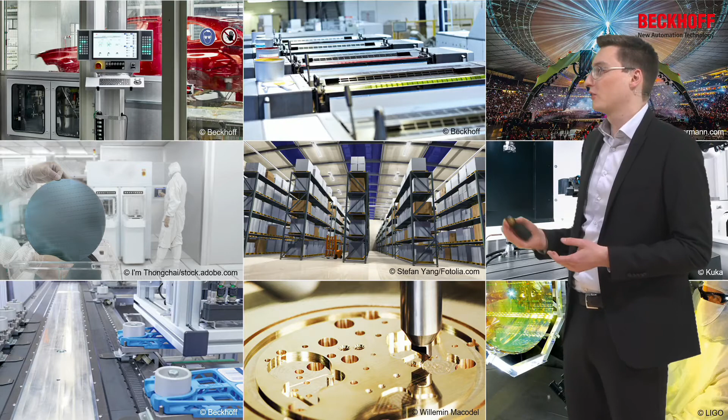And they are not doing this just from one industry, they are also from very diverse industries, so car manufacturing, printing, show and stage, entertainment - it's really all over the place. Automation products in general, and XTS and XPlanar in special, are used throughout all kinds of industries.

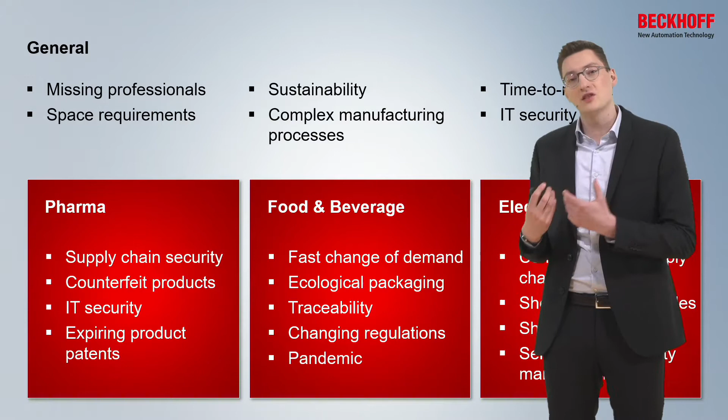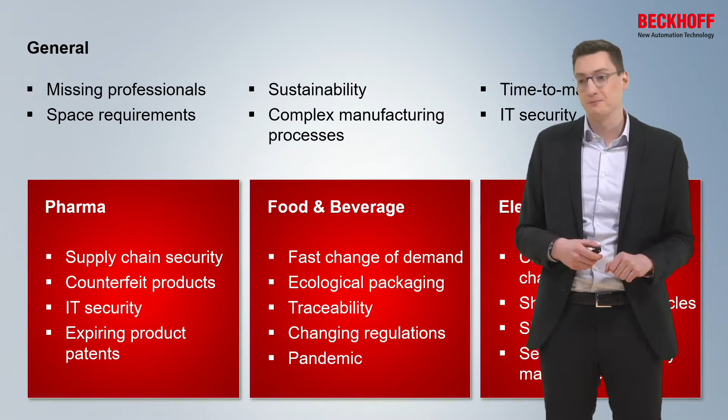To find a good story for this week, we looked at the challenges which we get told by our customers and end customers about certain markets, and we ended up with this graphic. This shows a couple of the big challenges which end customers and machine builders see in different markets. We would like to show within these presentations how we can help you solve some of these challenges with your next machine.

Today, we would like to focus on some things which we can especially take care of by using XTS. First of all, it's about space requirements and footprint. If you have a shop floor or a manufacturing building which is maybe inside an old town, where you originated, and there is no space for further growth, then it might be worth looking into the customer-specific trajectories of the XTS system, because there you can utilize really every square inch of your system.

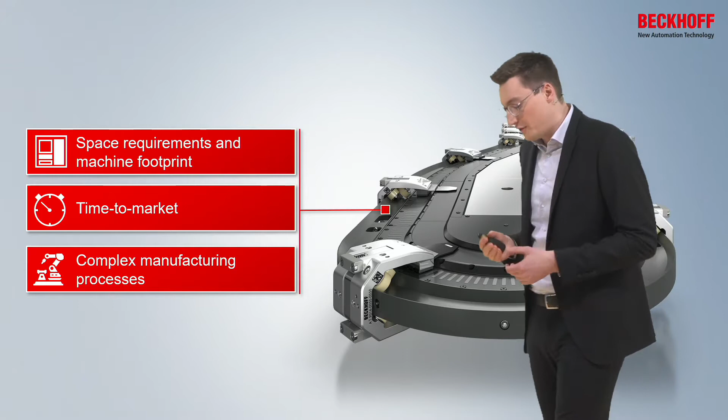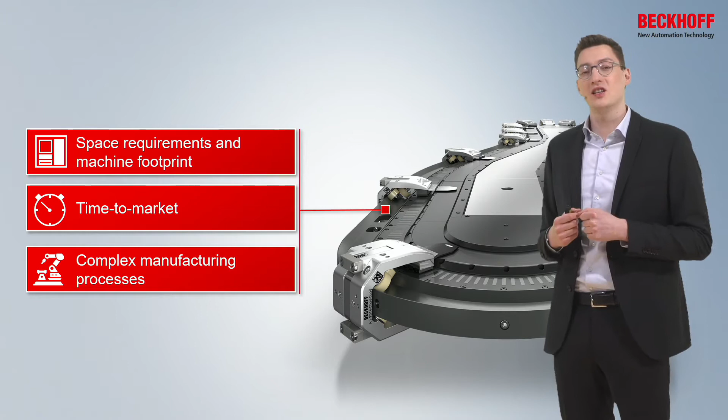The next point, which we would look at afterwards, is time to market reduction. This applies both for the product which is manufactured on the machine as well as on the installation, the setup, and the development of the machine itself. Last but not least, we would like to look at a real game changer in our eyes, the NCT technology, which adds many new functionalities to the XTS system.

But we would like to start with the XTS presentation about space requirements and machine footprint, and this will once again be brought to you by Rob Rawlick.

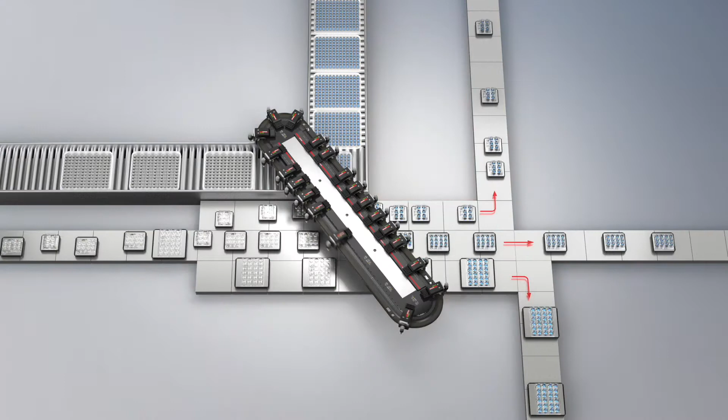The challenge for every manufacturer is making more out of what they have, using the existing factory space that they have rather than going out and finding a new piece of land to put in a new factory. We want to use the existing factories that we have, and sometimes it's simply not possible to go buy more land. Houses have cropped up around us, zoning requirements, and even just the whole construction process takes time. Building a new factory is not easy. It's a lot better if I can use my existing factory in a new way.

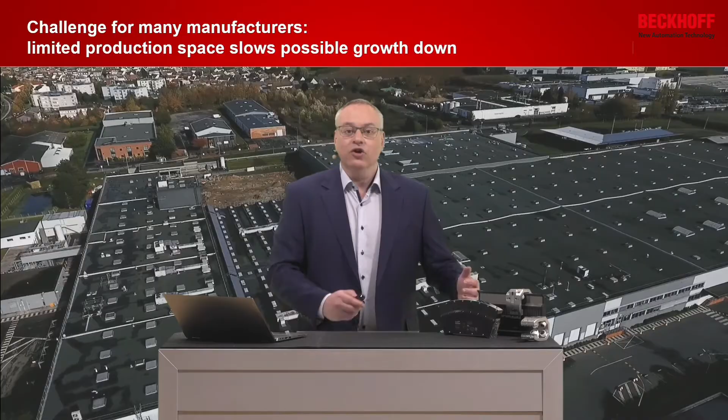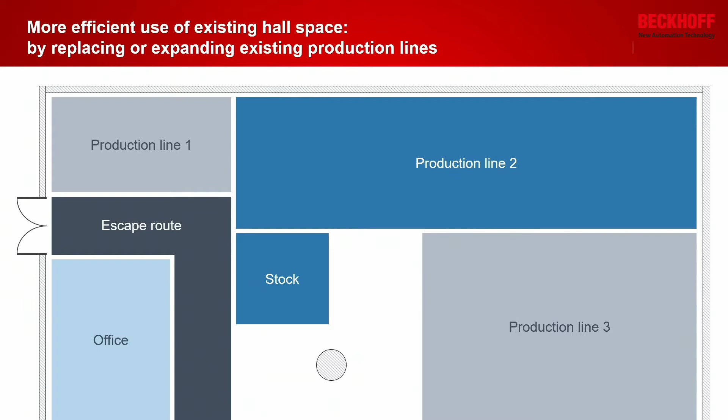So let's take a look at an example that a customer actually has had. They have an existing factory and they've got existing product lines and production lines, and they now need to make a change. We need to redo production line 2 because it's going to get not just one, but it's going to get 2 new products. So now, to make it all fit, we need to use our space efficiently, and we want to also increase the throughput.

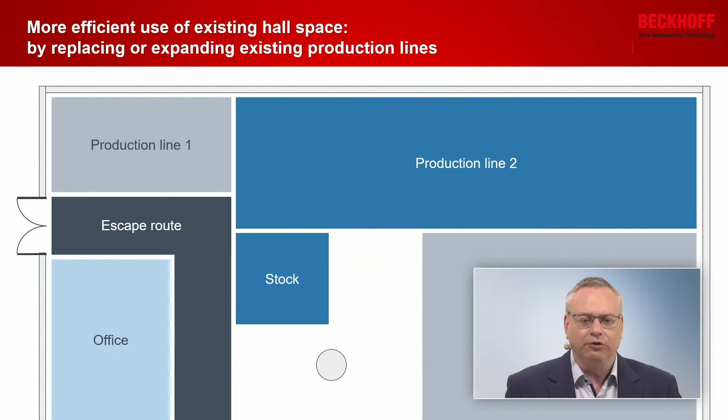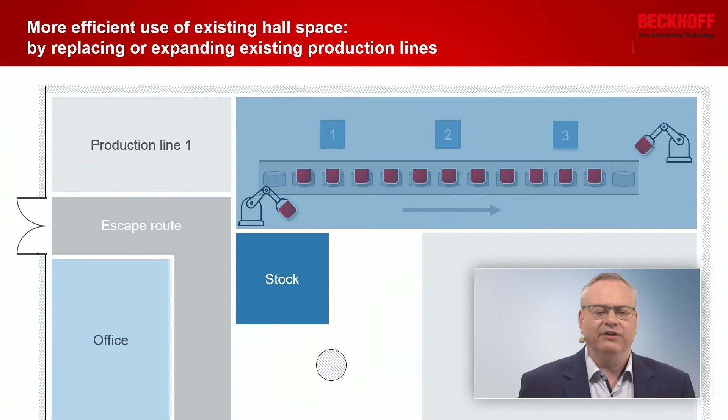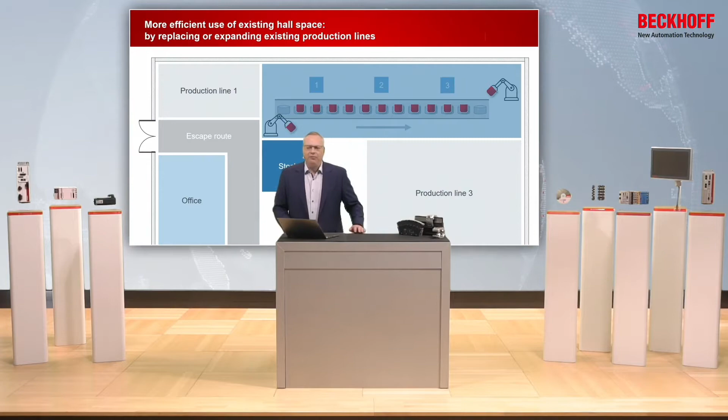The layout of everything is going to dictate where my machine can go, and sometimes it's not simply possible to rearrange everything and fit it all in. I need to make my machine fit where I have space. So I've got space in the middle, or down at the bottom, and I can bring in some more machinery, but how do I get it there? Do I build an over-top conveyor that brings it around?

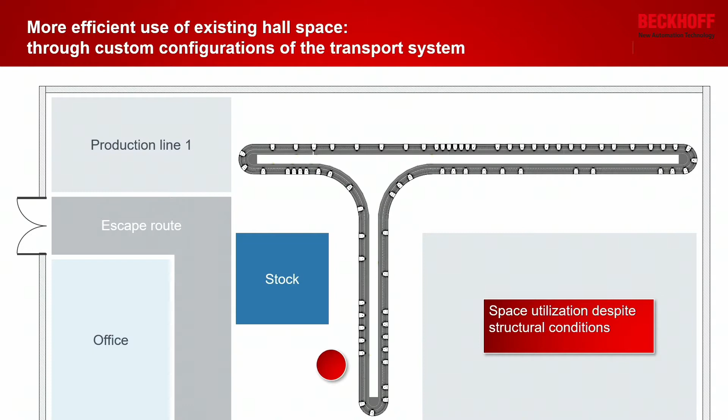Well, if I use an XTS, I can simply make the XTS go where I need it to go. I put in a few curve modules, and the stations that I need to have, and then I suddenly have a new production line that has more capabilities and fits around the existing equipment.

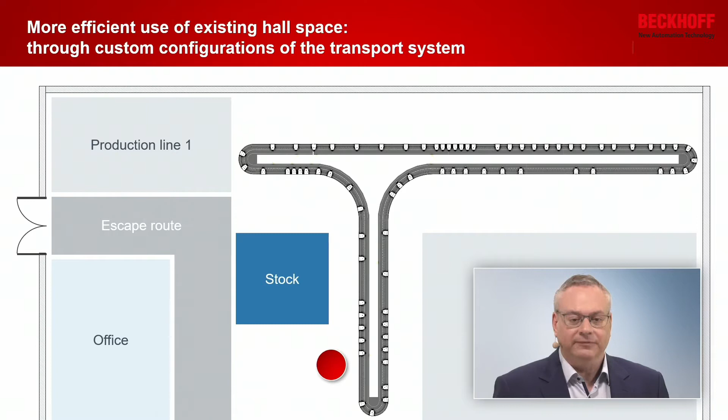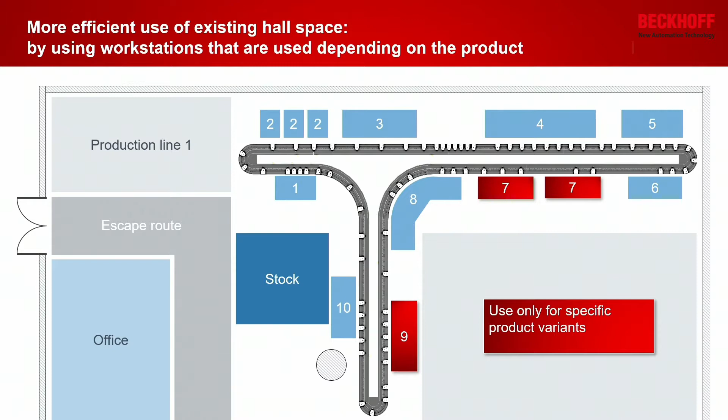And then I've made it so that I can run different products on the same machine, possibly at the same time, most likely independently, by integrating components that are used for products A and B, and having other components that are perhaps only necessary for product A. So things like Station 7, they are only used for product A, so when I'm producing that product, I'm providing those stations with movers and they're fulfilling their processes.

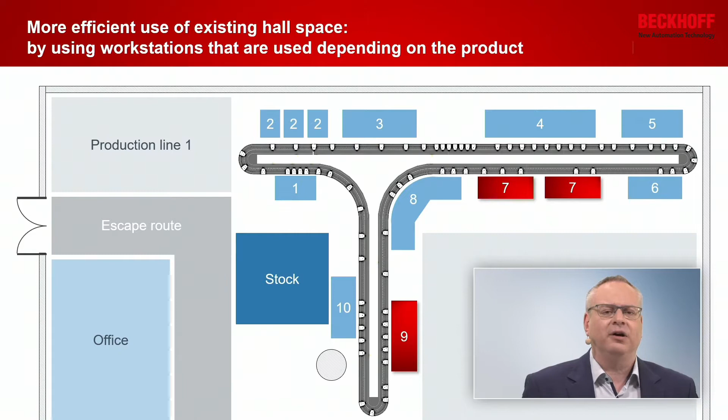But when I produce product B, I simply drive the movers by those stations. I don't end up parking a bunch of product in front of them. Could also be that when I do this change, I could do maintenance on the stations at 7, and while they're down, I can work on those and keep product B running through the machinery.

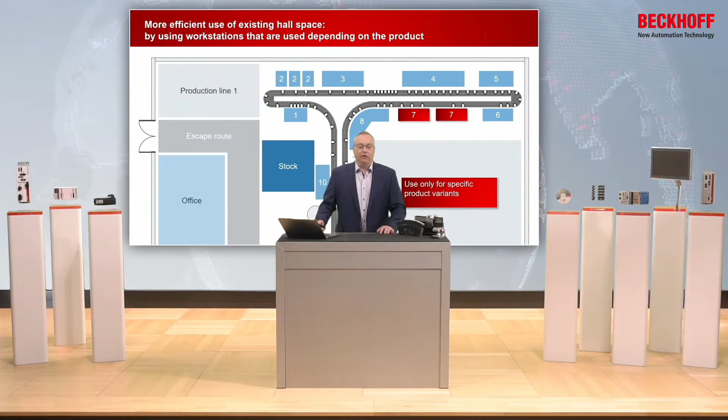So with XTS and all the different curve variations that we have and the different modules, we can make pretty much any layout. We can make L's, we can make Z's, we can make T's, U's, circles, and in a lot of cases just straight lines. So we can fit the XTS into the machine or around the factory floor where it needs to go.

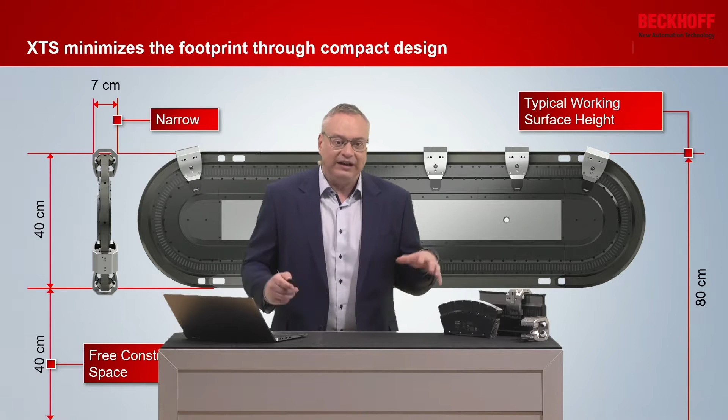And the XTS is super compact. With an on-top rail, we're talking 7 centimeters wide, so 2 inches, right? It's 40 centimeters tall, and if we use a typical working height of, say, 80 centimeters off the floor, the XTS, when vertically oriented, takes up 40 centimeters, and it leaves us 40 centimeters of room under the machine for stuff, for the mechanics, for the frame of the machine, or even for accessing things in the case of maintenance. I don't have everything packed right to the ground. I've got lots of room around the XTS.

And then I can take and put the XTS anywhere. I can mount it horizontally, I can mount it vertically, I can put it at an angle, or I can do my favorite one, I can make it mobile. We have customers who have mounted XTSs on moving structures. The XTS is light and it's small. In the case of this one with Denso, we've actually made the mover part of the end effector, and the whole kinematics can drive right around the mover end effector. So now I can drive my system endlessly.

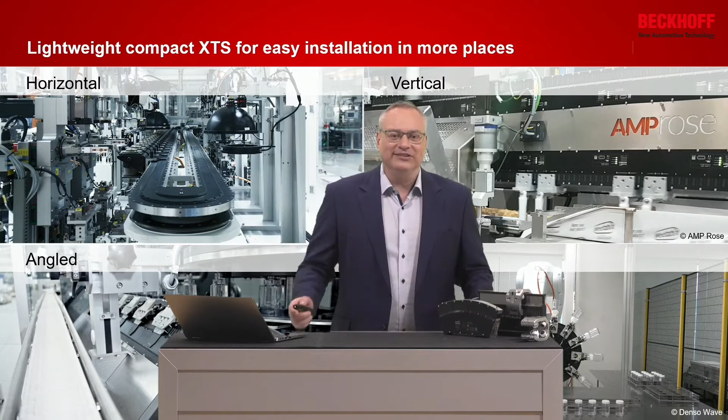So what we have for you is an XTS that can be made and put into your machine wherever you need it, either on the factory floor with special custom layouts, or directly into the machine with a compact construction, and you can install it in any orientation so that you can make the most of the factory space that you already have.

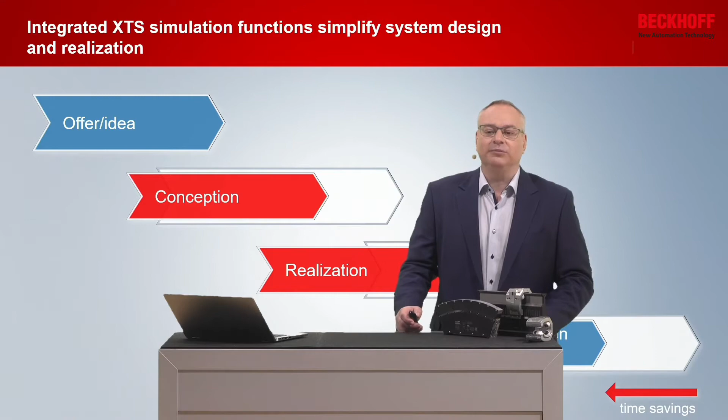So what can we do with an XTS? We try to take that idea to the concept, to the realization, and then into the field as quickly as possible, and we have lots of tools to help with this. For example, our simulation. I can build my entire machine, lay out all my stations or independent machines, and say how long each function or processing step takes. Then I can determine do I need 2 of these functions at a time, or 4, 6, 8, 12, whatever I need. I can run my machine, test it, verify how long my XTS needs to be, and verify how many movers I need to have. I can do all of this before I've built anything. Then I can take that running code from the simulation and drop it into the machine.

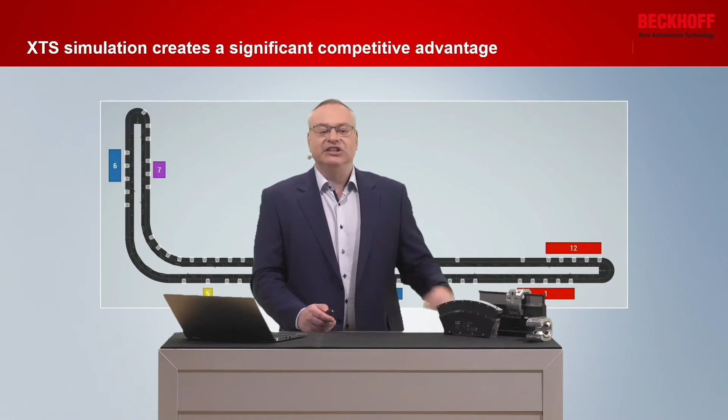I can do the reverse as well. I can take the code that's running on the machine, put it in simulation, and ask what happens if we change this, what happens if we remove station 3, what happens if I add another station 10 on the outside curve. We can test all of that before anything has to be built.

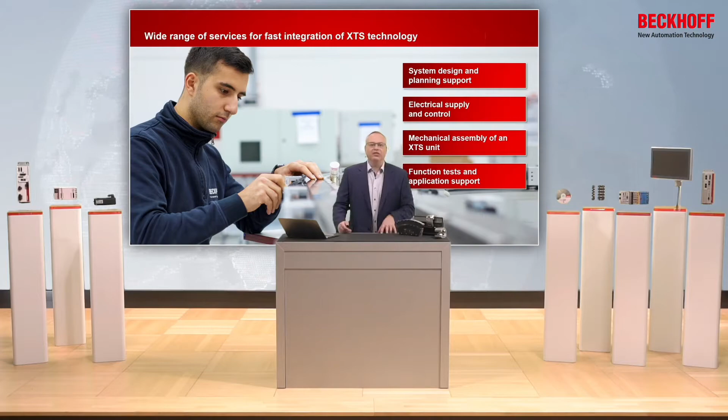With Beckhoff, we can also help with the entire XTS planning. We can help plan how big the XTS needs to be, how many movers there need to be, and we can also go through the electrical cabinet and decide where we want all the electrical connections and how much power we need to supply.

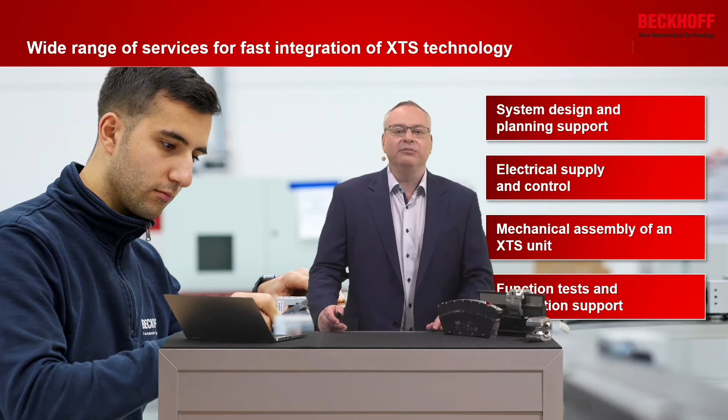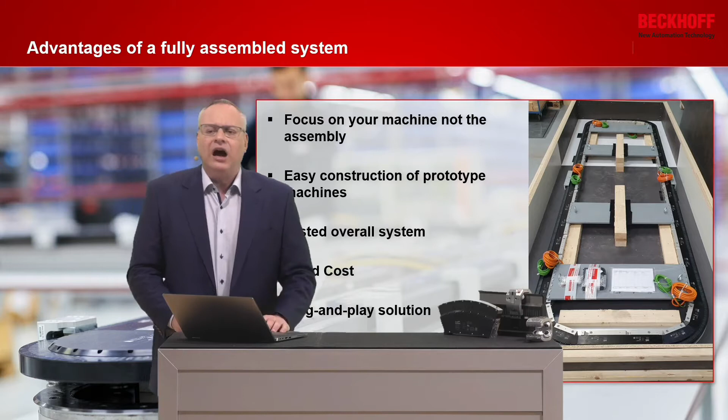We can then assemble the entire XTS mechanics. We take a machine bed, mount the rail, mount the motor modules, mount the movers, and deliver a fully finished system that's already been tested, so it arrives, you take it out of the box, mount it in your machine, drop your simulation code in, and you're ready to start testing and running. Now instead of worrying about how to build the XTS, how to mount the rail, how to fit everything in the machine, how to mount all the movers, whether everything is lined up, or if the machine bed is flat enough, I can focus on my machine and making it do what it's supposed to do.

Building a prototype machine is now quicker and easier. I order an XTS of a certain length with a certain number of movers, it arrives, I take it out of the box, put it on, and away it goes. All the movers have already been fitted, tested, and set to run. I know my costs for the assembly and installation of the XTS up front, and I simply put it in and run. I have a full plug-and-play solution.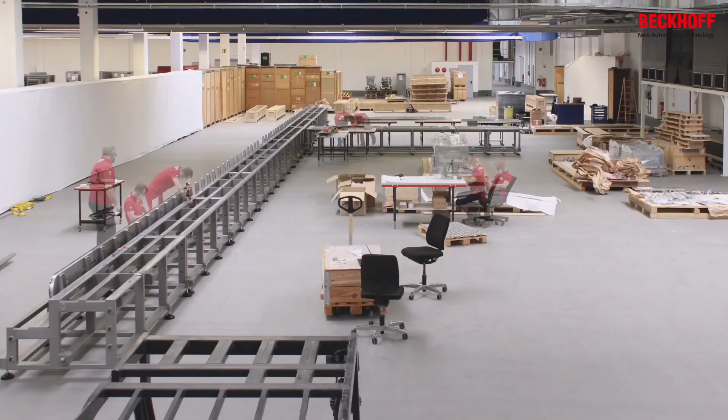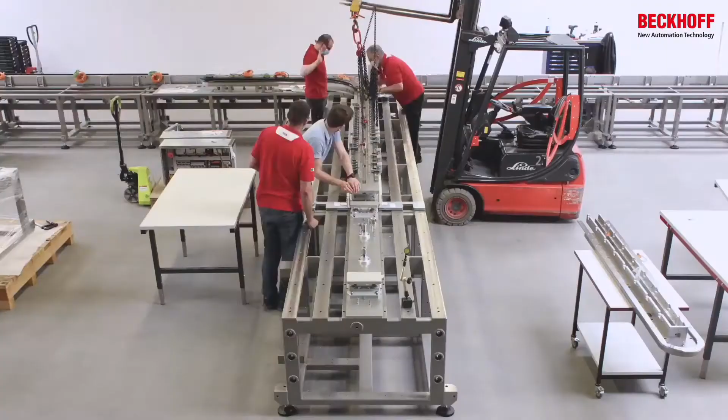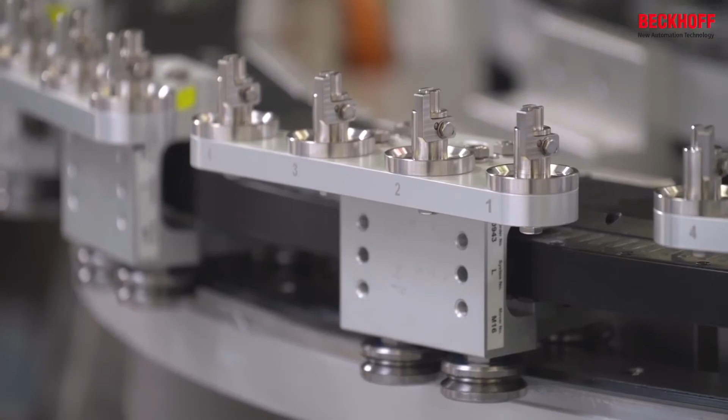This is exactly what one customer has done. They took the XTS and the simulation shown before, and added to it. In fact, they have multiple XTSs in this system. It's a long system, several hundred movers are involved, and the entire system ran in simulation before they built it. In about 3 days, they mounted the entire system, put all the product and holders on, ran the simulation code, and had a full machine running at rate 3 days after the first frame was mounted, including synchronization to all the other components in the system.

With the XTS, I have the capability not just to make my machine faster and easier to build, but also to make it easier for the end user to change the products placed on the XTS — whether small products using 2 movers with specific spacing, or larger medium-sized or even extra-large products. I simply adjust the location of all my movers, and suddenly I can do lot size 1, giving one bag this much and the next bag that much. The other way end users can adjust product size is by using two movers together.

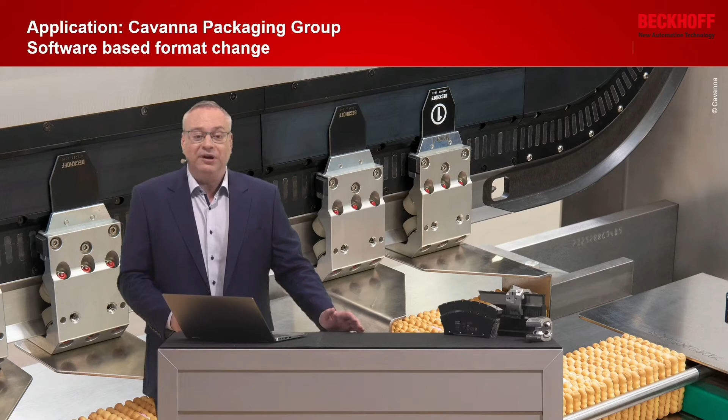Cavanna has done exactly this. They've taken it and said, okay, I want to put a certain number of cookies in a tube, so I simply space the two movers closer together or further apart to have more product between them. If marketing comes along and says we want to do a plus-2 sale so every tube has 2 more cookies, great — small adjustment to the positioning of the movers, and I need new foil to pack the product into, but now I have a full new SKU without changing anything.

The other way to do things is the way Kliklok has done it. They don't use different mover spacing — they use different mechanics on the mover, but they've made a system where they can simply, with the push of a button, pop one mechanic system off and put another one on, ready to run the next product size. So yes, there's a changeover, but it's extremely short. There's no chain to take out of the system — they go through the 10 or 15 movers, take the tooling off, put the new tooling on, and they're ready to go in a matter of minutes.

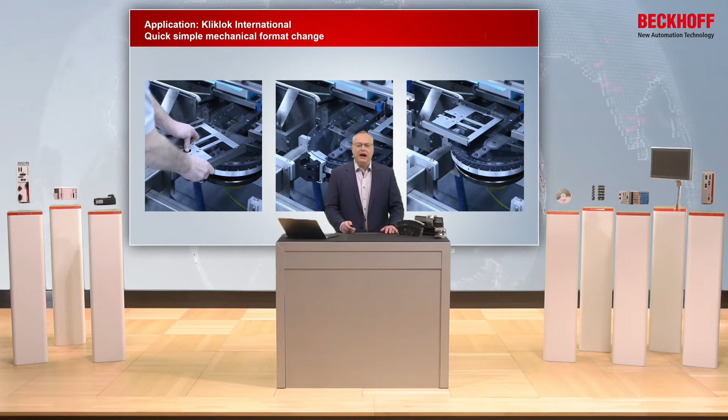The other way to do things is to change the entire machine. Maybe I don't know the processes I'm going to run yet, so I lay out a system and say I'm going to have a number of spaces where I can dock in a machine that does something. Then I can change the product being produced, change all the steps involved, add and remove things, even make things not yet invented. So I have a system that's all set to go.

Customers have even taken this one step further, not just having stations that dock on and off the system, but containing the rail as well. So they take an entire section of XTS out to make the machine shorter, or put a module in the middle to make the machine longer, or swap modules. That's for doing complete assembly lines. So both approaches are possible, and we have customers that do both.

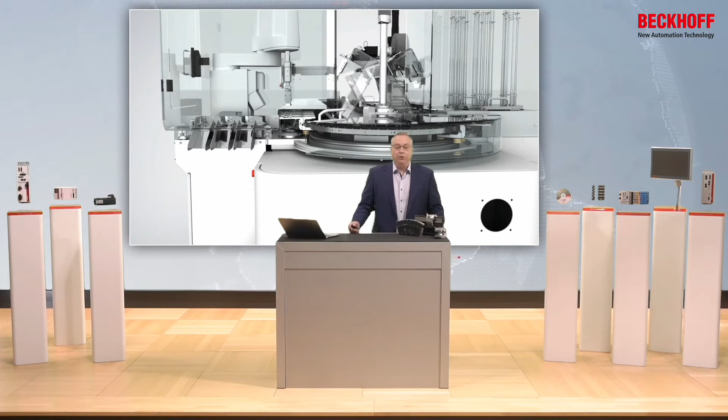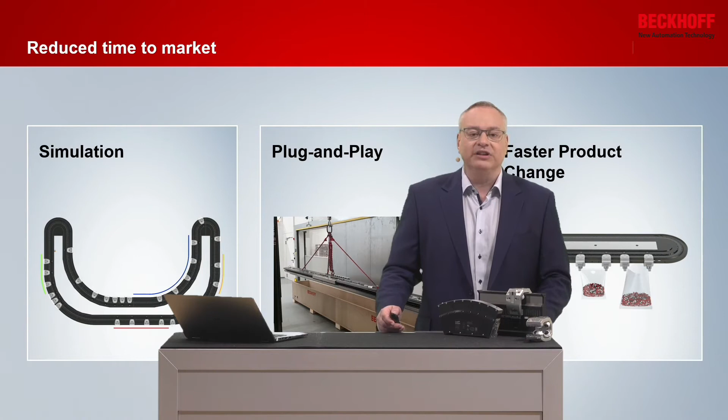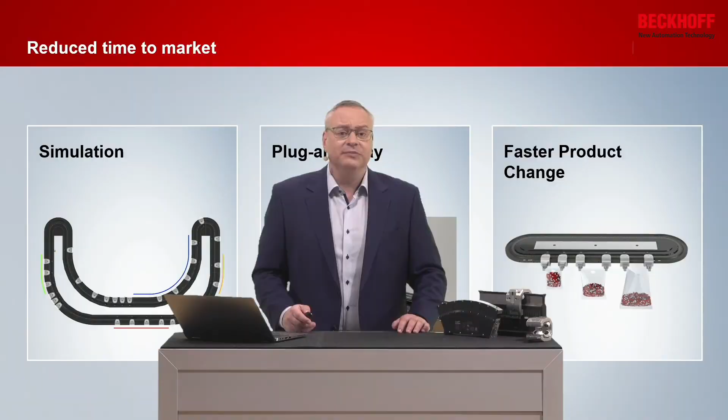So we can reduce your time to market by simulating the operation of your machine, verifying it will run before it's built, and providing a fully assembled XTS that's ready to take right out of the box and mount in the machine. For end users, as you change products or invent new ones in the future, your XTS is future-proof. All that's needed is programming adjustments, or if it's already built in, simple push-button adjustments, and now you're ready to run a different product on the same machine.

So I guess there's really no reason to back off from XTS, because you can do proof of concept in advance, adapt easily to changes in the market through software-based tool change, and we can even help you with the installation.

While Rob was talking about that, Annie sent a question asking if it's possible to add additional length to an XTS system already in the field. Rob already gave a partial answer, because it is possible, but it should be considered in the initial design. Some customers set up 1-meter segments of XTS, so if they feel there's a need for another station or more length, they can just add another machine module to the existing system. That's possible, but it should be considered before the first installation, because if you have one big milled steel or aluminum block as a machine bed, it's hard to put something in there.

This was a short look at installation, simulation, and the customer-specific trajectories we covered earlier. Now we'd like to look at something completely new. Right from the beginning, it was always a question whether it's possible to add energy and data to the XTS mover, and now it's possible with the new NCT technology.

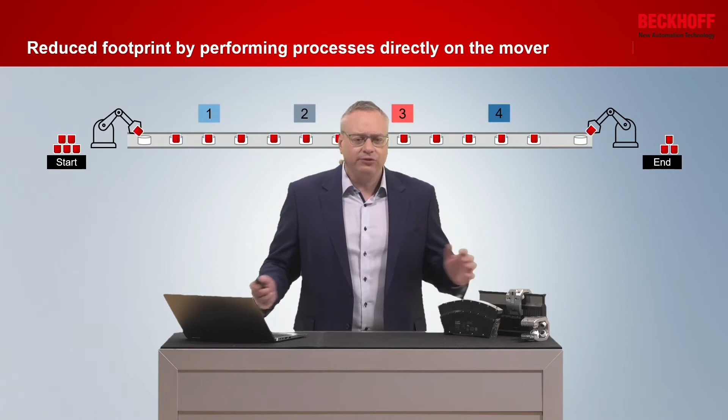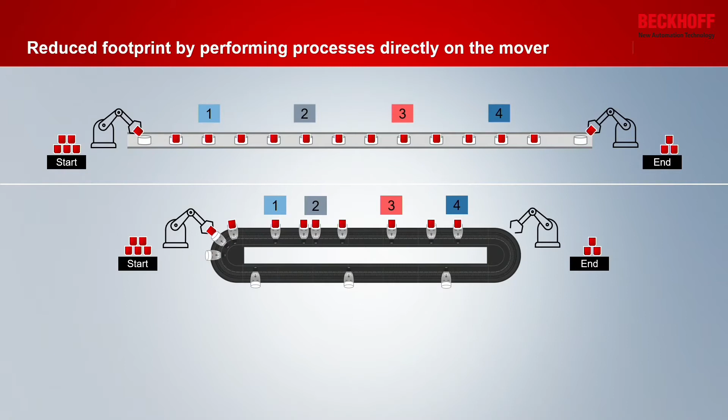In the past, we've taken the XTS, or original lines, and put an XTS into the line, shrinking the lines down and eliminating a lot of conveying. We end up with systems like this, where I now have a much shorter XTS, bringing things directly from one station to the other.

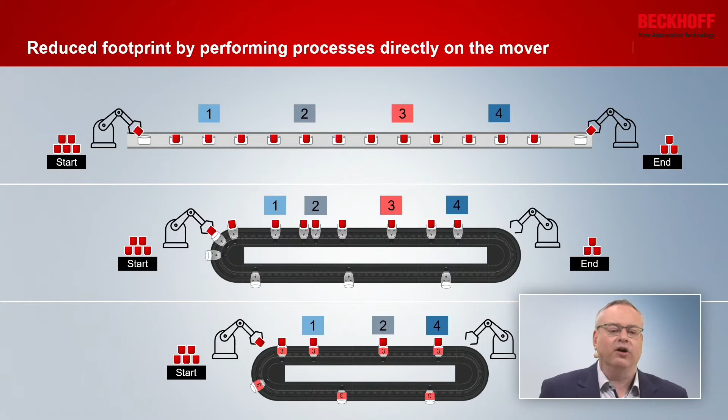But now we have the capability to eliminate a station and say, I have a function and I want to put that function right on the mover. The mover is now active, so I can completely eliminate station 3. Well, I didn't eliminate it, I made a bunch of them and put them on each individual mover. But for the line length, that eliminates a station.

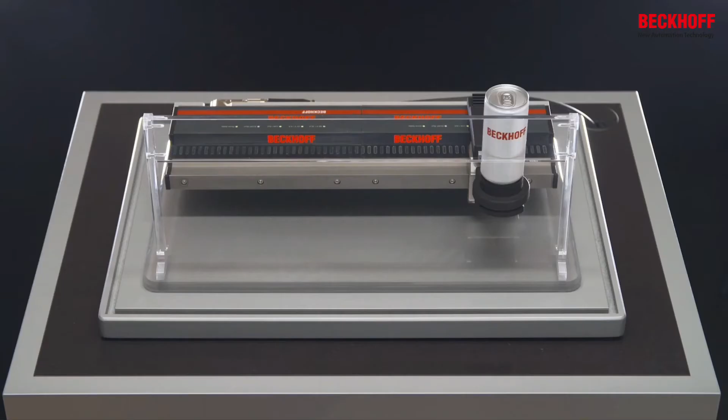So now I can perform specific functions on the mover underway. One example is orienting product. In fact, some of you may remember from 2015, we had a big XTS that did exactly this. It oriented product, with a whole bunch of little cans running around, bringing them into a station, stopping, and orienting the product.

Well, here now we can take a camera, take a picture of the product, and while the mover's in motion, we can orient the can in whatever position you like. If they should all be the same, if they should be different, or should line up and synchronize to another external process, we can directly coordinate the motion occurring on the mover with an external motion in the system. So now I can coordinate my movers to another process, and the movers can do things for themselves.

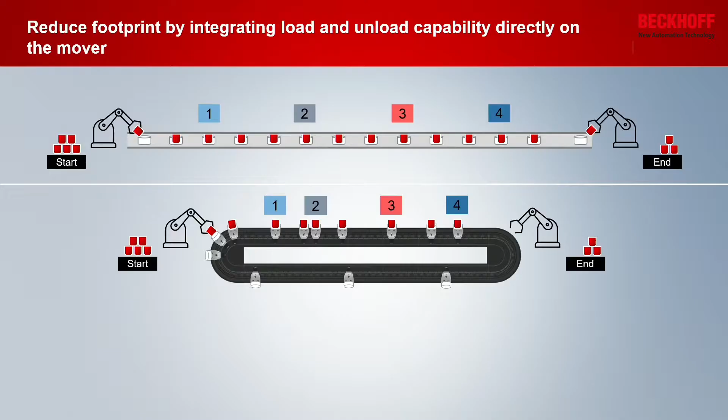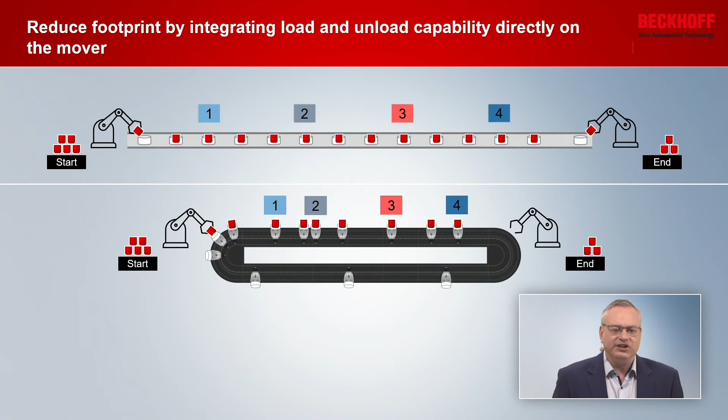Another way to reduce the footprint of the XTS is with load and unload. Usually we have a system where we've optimized the operation of the machine itself, but I now have special mechanisms that need to line up product, and a robot brings in X number of product, and a robot takes out X number of product, maybe changing grippers for different format changes, but I have to have a way to load and unload all those components.

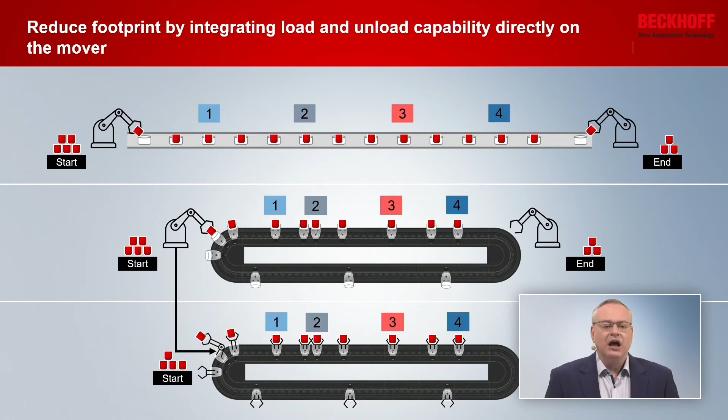What we can do now is put the robot on the mover itself. So now the mover can pick its product and place its product. So now I eliminate these complicated sections at the beginning and the end, and I can change basically wherever the mover parks. I can now drop a product, change any orientation, any product layout that I want, and do that with the mover itself.

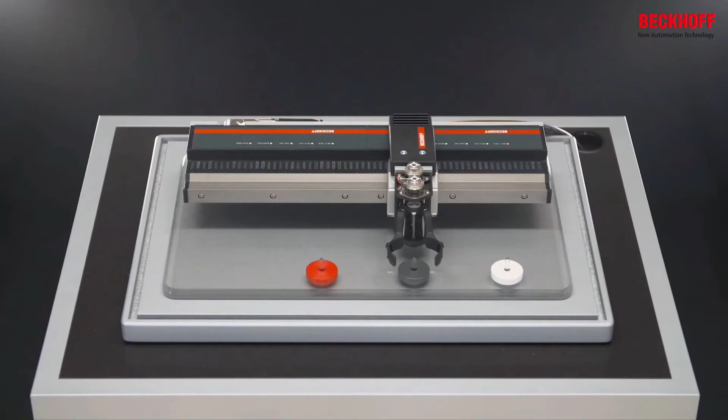And here we see it in action. This is a very simply based mover. We've put 2 motors on it and built a little gripper. There's tons of different grippers that can be mounted on the mover, basically anything you can imagine. If you can figure out how to make it go, you can mount it on the mover, we can power it, we can talk to it, and we can move it to pick up its product, run it through its processes, place it very accurately, and then go on to the next product, eliminating all this extra complicated load-unload sequencing.

One place this could be used is in the packaging industry, where we have a lot of cases with irregular flow coming in, not just in one row, but all over the place. We use a Delta robot to pick that and place it into packaging in a different layout, whatever grid layout it's supposed to have. Well, the speed of the Delta is determined by the distance it has to travel; the further it has to travel, the longer it takes. What we can do is put a whole bunch of little robots onto the movers themselves.

So now each mover is a very small Delta - well, it's not a Delta, but it can be moved into a different location, and it can do its own picking and its own placing. And what that means is now I've decoupled the pick and place distance from the speed.

So I can put my place as far away as I like, or even on the other side, and I don't lose any throughput. At the same time, I also have the capability to buffer a little bit. So if I have 30 movers with little pick and places on them, I can pick up 30 products, carry them, and when the downstream system is ready, boom, I can go through and place all of my products. With Delta robots, I'm limited to the number of deltas for the number of products I can have in process at any given time.

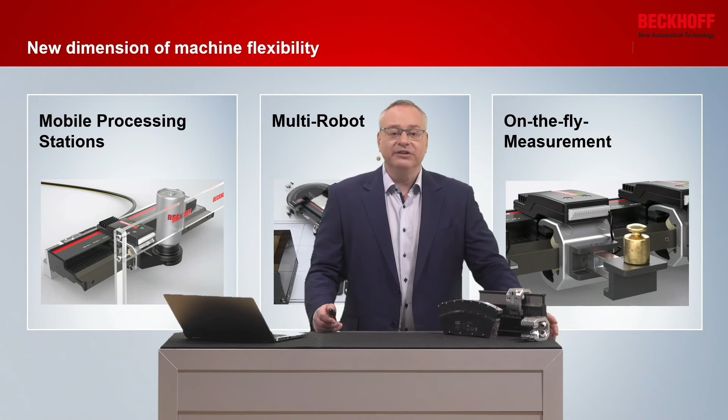So we get all of our information back. We can heat something, we can weigh something, we can pick something. And this allows you a lot of flexibility, whether you do the processing on the fly, whether you build up a multi-robot system, or use measurements on the movers to verify product and do things like quality control. All of that's now possible directly on the mover without any cables.

I guess, and I hope, that some ideas already popped up in your head about things which you can measure on the fly with an XTS mover with NCT technology, for example, or about how you can realize a very capable picking process by a combination of XTS and XPlanar.

By the way, for sure, that's my favorite XTS presenter. An innovative technology such as the XTS NCT technology needs, for sure, customers which are very curious about technology. But before we sell to customers, we of course have to sell to our global sales force. And therefore, I'm very happy that I have with me on stage, virtually, one of our colleagues from the sales force, Frank Würtner, who is taking care of the global Beckhoff packaging activities.

So Frank, where are you? Can you hear me? Yes, hello Felix. Perfect, I hear you quite good. Yes, I'm on a travel trip in Austria. But during these times, it's very easy to get in touch with you via these internet tools. Looks also like a very nice location where you are, and I guess you are visiting the next XTS customer?

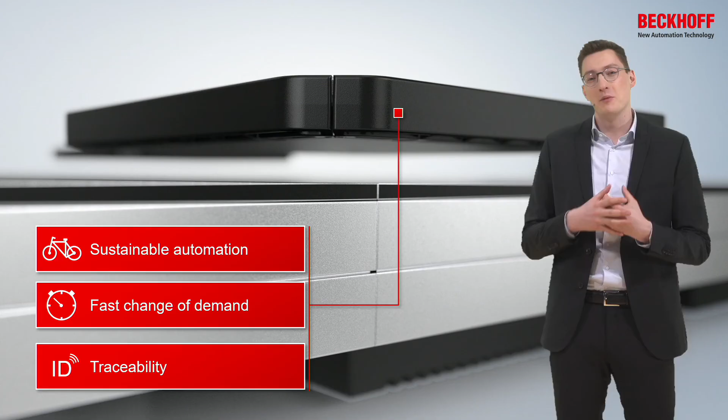Before we say goodbye, I would like to give a very short teaser for tomorrow. Today it was purely about XTS. Tomorrow it will be about my favorite intelligent transport system, the Xplanar. We'll look at the sustainable aspects of our Xplanar system, the possibilities of machine layout extension with Xplanar, the mechanical installation, so once again something for the mechanical guys maybe, and about traceability, which Rob talked about yesterday, a key component for modern food or pharma machines.